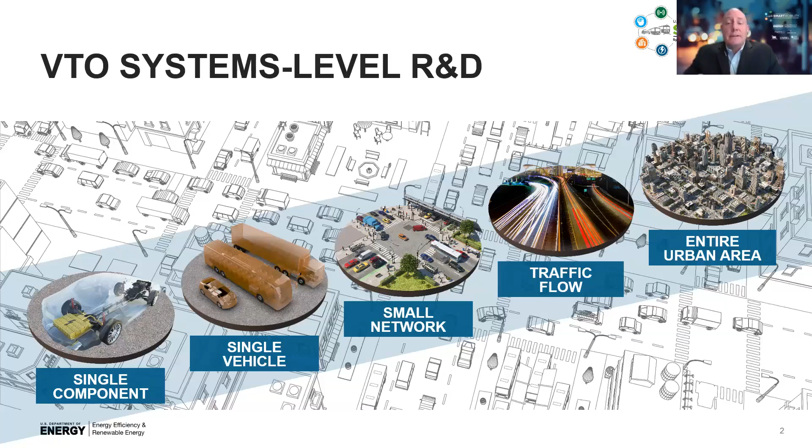So we look not only at technologies at the vehicle and powertrain and component level, but also at how vehicles interact with each other and with infrastructure at the small network or corridor scale, and then we can evaluate the system in terms of overall traffic flow and energy consumption, finally understanding mobility and developing solutions that improve mobility at the entire urban or metropolitan area.

To do this, to comprehensively research and model and develop solutions that reach across modes and domains, it takes a multidisciplinary approach. We have to consider transportation holistically as a highly interactive, very complex, highly dependent system of systems in which changes in one system can propagate to and affect others. And so while we must understand each of these systems individually, it's just as important, or maybe even more so, to understand how they fit together, how they interact, and how they affect one another.

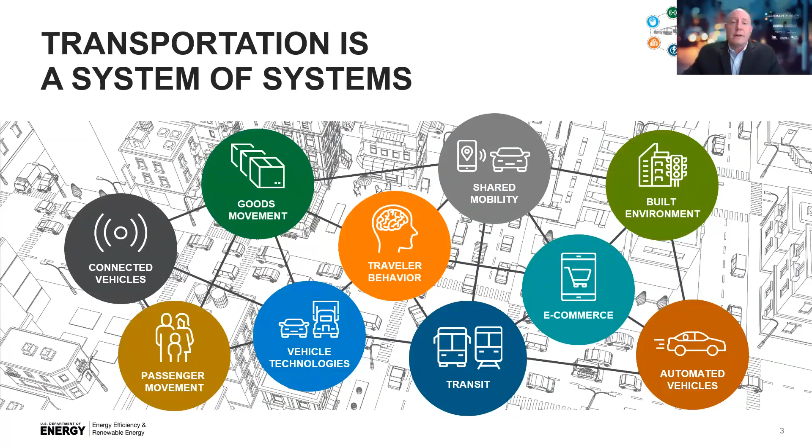The first phase of our consortium was divided among 5 pillars of research shown here, and they are connected and automated vehicles, mobility decision science, multimodal freight, urban science, and advanced fueling infrastructure. The research results that John and Eric will describe today largely come from the advanced fueling infrastructure focus area. But as I said before, the consortium is multidisciplinary and cross-cutting, and these focus areas were very much interrelated.

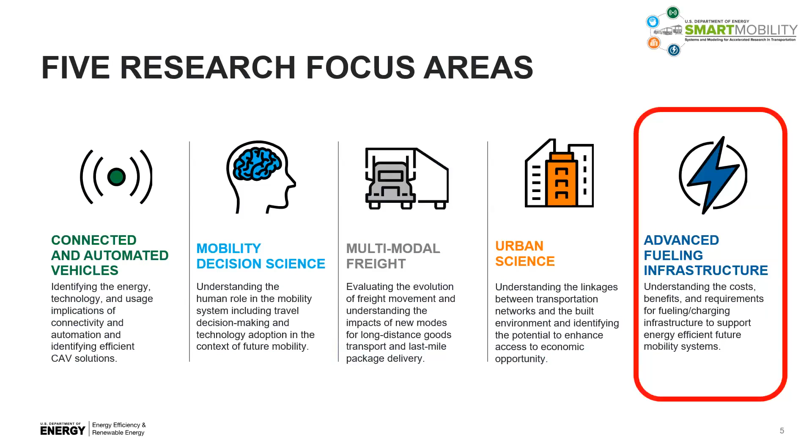Many of you are likely familiar with what has been called the charging pyramid. It applies to our current vehicle paradigm. The base of the pyramid says that most charging will be done at home, whether single family or multifamily dwellings. The middle of this pyramid says that the next highest need and use will be workplace charging and fleet charging, while public charging, typically at higher power, shown on the top of the pyramid, will fill in the gaps.

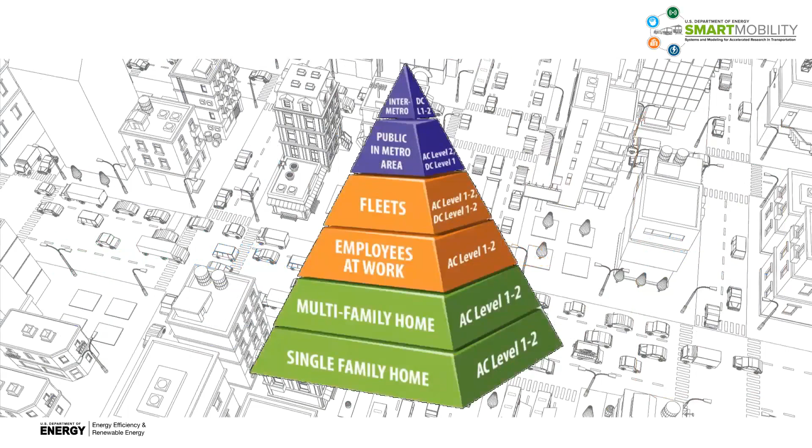But it may be that a future mobility scenario, which is automated and connected and largely shared or fleet operated, could turn this paradigm on its head. So our research set out to understand this, to understand what the need is for different types of infrastructure, whether it's centralized or distributed. What operating modes make the most sense? Is it more chargers? Is it faster charge rates? Is it longer range vehicles or more vehicles? And how do you manage the infrastructure to fit different scenarios?

We looked at charging infrastructure to serve both passenger movement and freight movement, and even evaluated the opportunities for wireless charging. After all, if we have automated vehicles, it may make sense to have automated charging. The research questions outlined in the Advanced Fueling Infrastructure Capstone Report, which is available to download on the VTO website, are summarized here. What are the charging needs of future vehicle and mobility service segments?

What are the costs and benefits of different approaches to charging infrastructure, specifically to serve light-duty ride-hailing vehicles and Class 7 and 8 freight vehicles? What are the opportunities for automated vehicle charging? And finally, if we plan and deploy the right set of charging infrastructure, what might the large-scale national benefits be?

Now, before I turn it over to John and Eric, I want to reiterate a point that I made at the beginning of this webinar series back in September. When we think about it, mobility is the foundation of how humanity interacts and connects, and we don't think that's an overstatement. It has driven the development of cities and of civilizations for centuries. Transportation gives us access to opportunity in the form of healthy food, good jobs, quality education, adequate health care, and plenty of leisure and recreational activities.

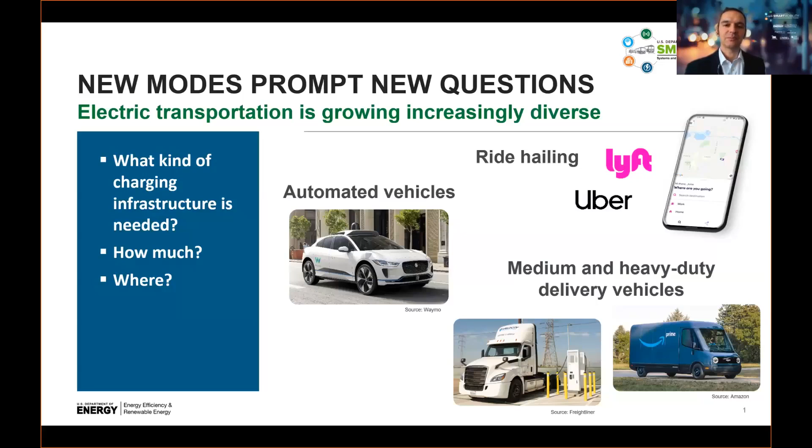Since we began our research, market developments have validated the importance of answering these questions. Waymo has launched the first public robotaxi fleet using plug-in electric vehicles. Lyft and Uber have made significant electrification commitments. Driverless electric shuttle demos are taking place in numerous cities across the country, and truck manufacturers are bringing electric trucks to market.

Our research found that there is no universally right amount of charging infrastructure. There is no golden ratio of charging stations to vehicles, because the charging needs of different modes and use cases vary. Additionally, even within individual use cases, trade-offs abound. Nevertheless, we found that it is possible to use modeling and simulation tools to manage cost-benefit trade-offs, provided that we understand the behaviors and interests of stakeholders in each use case. In this presentation, we'll share principles we have learned to guide charging infrastructure design for multiple use cases.

A similar distribution of driver activity patterns was found in a large GPS data set of ride-hailing activity in Austin, Texas, including 1.5 million ride-hailing trips. This data, made available by RideAustin, a local TNC, found that half of the drivers in the data set were operating less than 10 hours per week, and only 10% of drivers were operating more than 35 hours per week. While full-time drivers are often the focus of TNC electrification conversations, our work finds that they currently make up a minority of drivers and rides on TNC platforms.

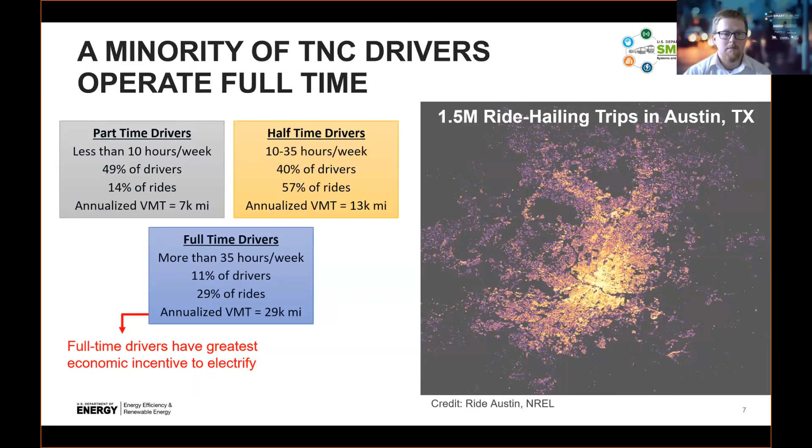For the minority of drivers working for TNCs full-time, we wanted to investigate the economic incentive for electrification. This prompted running a 5-year total cost of ownership analysis, considering present-day EV prices, the amount of time required for midday charging, and excluding federal or state financial incentives. Results of this analysis found that 250-mile EVs provide similar total cost of ownership to representative gasoline vehicles, and slightly higher cost than today's gasoline hybrids. These results were found to be sensitive to many variables, including vehicle purchase price and fuel costs.

Collectively, these first few slides suggest that there's a relatively weak financial incentive to electrify ride-hailing services under present-day economic conditions, especially considering that not all drivers have purely financial motivations, a minority of drivers operate full-time, and EVs currently come with an upfront premium. However, ride-hailing vehicles remain an attractive segment for electrification based on the potential energy and emission savings relative to vehicles operated only for personal use.

In order to realize these savings cost-effectively, progress must continue to be made on reducing vehicle purchase price through technological advances and economies of scale, potentially with purchase incentives used to bridge the gap. Importantly, these total cost of ownership results assume regular access to overnight charging. However, we know that is not always an option.

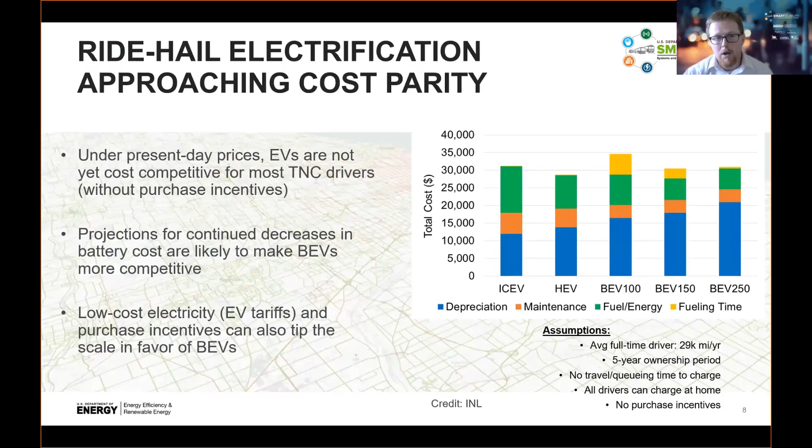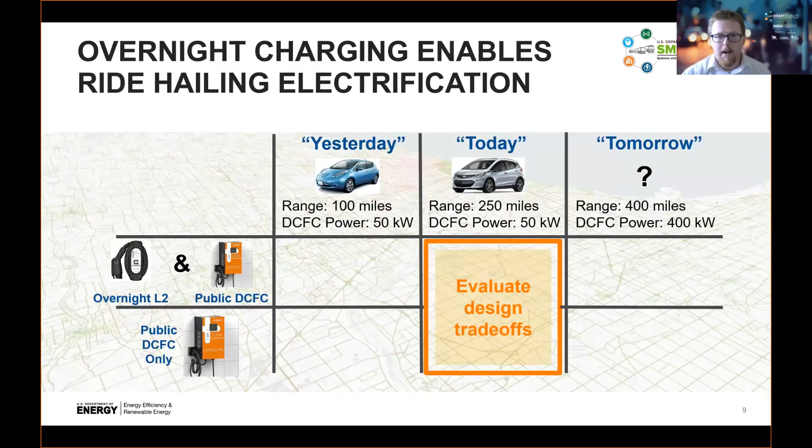To help illustrate the role of overnight charging in TNC electrification, a simulation experiment was designed using several combinations of vehicle and charging technology. While we don't have time to review all results today, I'd like to focus on a present-day vehicle technology scenario that highlights infrastructure design trade-offs between overnight level 2 charging as the primary charging location, with public fast charging used as necessary, versus a scenario where overnight charging is not available and public fast charging is the only option for ride-hailing drivers.

Simulations leveraged 5 million miles of real-world taxi operation data from the Columbus Yellow Cab fleet in central Ohio. Results showed that consistent access to overnight home or depot charging obviated much of the demand for public fast charging. In simulations where the fleet had access to overnight level 2 charging, only 9% of the fleet required midday public fast charging to maintain existing operations. However, in simulations where overnight charging access was restricted, we found 100% of the fleet relying on the public fast charging network 1 to 2 times per day.

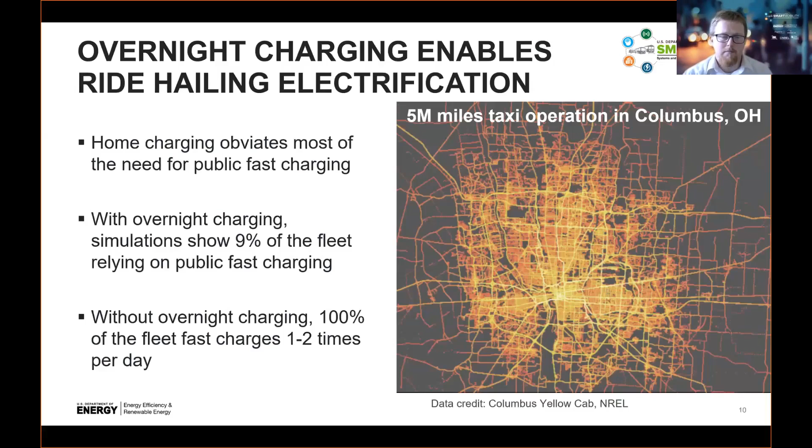This dramatic increase in demand highlights the need to understand the socio-demographic characteristics of ride-hailing drivers. Revisiting results from the Populus National Survey of over 1,000 TNC drivers, we find that 40% of drivers live in multi-unit dwellings, with lower income households being more likely to rent and/or live in an apartment. For example, over 80% of TNC drivers from households with an annual income below $35,000 either rent their home, live in a multi-unit dwelling, or both.

This result emphasizes that efforts to electrify ride-hailing fleets must not only be accompanied by investment in public fast charging to support high-mileage drivers, but also by investment in public and private level 2 infrastructure at or near where TNC drivers live in order to enable regular overnight charging.

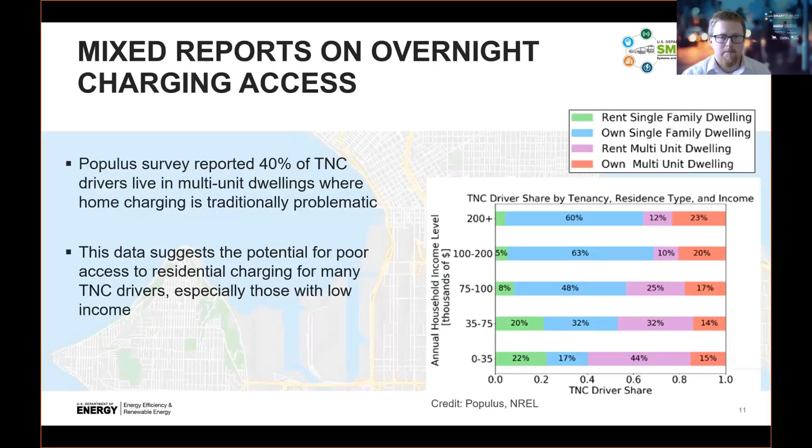Thinking further about investment in public infrastructure, it's no secret that the capital costs of fast charging infrastructure are significant. Does the site have sufficient hosting capacity? Are electrical upgrades required? How much trenching is necessary? The answers to these questions can result in a capital cost varying significantly from site to site. This realization may prompt charging networks to search the region in hopes of finding the least costly site for development of new fast charging stations.

While tempting, our work suggests that failure to design networks around anticipated demand can make low capital cost locations financially problematic in the long term. A simulation study conducted in Columbus, Ohio, in partnership with the local electric utility, American Electric Power (AEP), evaluated a dozen potential fast charging sites. Based on the simulated charging demand and existing tariffs, we found that the effective cost of electricity at sites with low demand was financially unsustainable in the long term.

Sites with less than 250 sessions per month were forecasted to experience effective electricity costs up to 75 cents per kilowatt hour. These estimates exclude capital costs and are largely a result of inability to distribute demand charges in a sustainable manner. However, well-utilized sites were able to bring down the effective cost of electricity to below 20 cents per kilowatt hour, a much more reasonable expense.

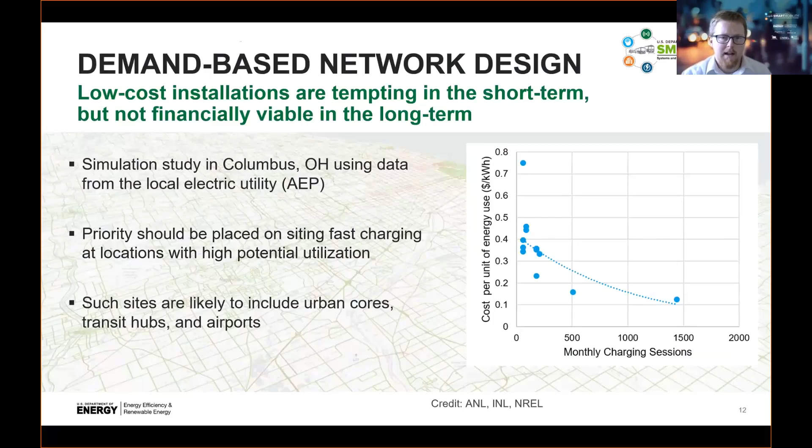While we've been focusing on charging infrastructure as it relates to ride-hailing electrification, investments in public charging do not necessarily happen in a vacuum. As part of our research, we wanted to explore what secondary benefits may be associated with investment in public fast charging infrastructure supporting TNC electrification. To do this, we coupled a national model of consumer choice for forecasting personal vehicle sales with a charging infrastructure demand model in order to evaluate scenarios with increased demand for ride-hailing at various levels of electrification.

Results suggest that investment in public charging infrastructure not only can benefit ride-hailing drivers, but also induce demand for sale of personal EVs by up to 10% in 2030. These benefits stem from increased public exposure to EVs as a TNC passenger, increased visibility of infrastructure alleviating range anxiety, and providing more away-from-home options to households without consistent residential access.

Additional benefits are garnered by charging network companies who have the potential to experience increased utilization of charging infrastructure driven by demand from personal EVs and TNC EVs without residential access. With that, I'll turn it back over to John to present results from additional use cases.

Thanks, Eric. Now I'll summarize findings from our study of human-driven electric car sharing.

Next, we looked at electrification of trucking for regional goods delivery. In a case study of a private regional haul hub and spoke motor carrier based in Dallas, Texas, we modeled Class 8 truck operation where the trucks have access to high power charging at loading docks. We varied EV range from 300 to 500 miles and charging power between 150 and 350 kilowatts. And we determined what it would take for electric trucks to perform the same daily driving as the current conventional truck fleet.

Real-world data describing the operation of this fleet indicated that drivers often chain several trips together into routes or circuits. Often, trucks drive circuits of over 300 miles before returning to the originating regional distribution center.

In our modeling, we made generous assumptions that trucks would plug in without queuing and charge continuously without any power curtailment at regional distribution centers and at every destination along the circuit where loading and unloading occurs.

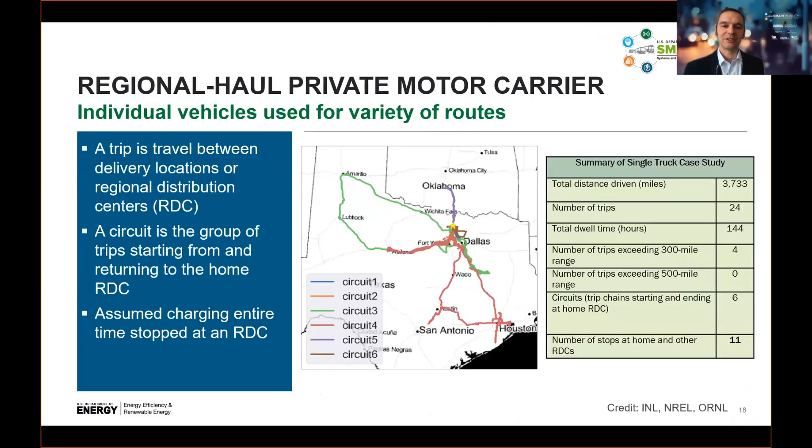This suggests that fleets of this type will need to either use trucks and charging equipment capable of very high power, or adjust their operations to accommodate electrification. Fleets may need to lengthen dwell times to allow for sufficient charging, take time to charge at public charging stations, or limit electric trucks to specific routes.

These complexities add real costs to fleet operations. To realize the potential benefits of electrification, fleets need new tools to help them not only define vehicle and charging infrastructure requirements, but also understand and manage required operational changes.

Now I'll describe our work with automated electric ride-hailing. Using sophisticated modeling tools in the smart mobility modeling workflow, we simulated the operation of automated electric ride-hailing vehicle fleets in San Francisco to understand how charging infrastructure impacts the fleet's ability to serve passengers.

We included human-driven electric and human-driven conventional ride-hailing vehicles in the simulation to represent a competitive market. We examined trade-offs between fleet and charging infrastructure design, mobility, energy consumption, and cost by simulating fleet operation with either sparse or rich charging infrastructure networks.

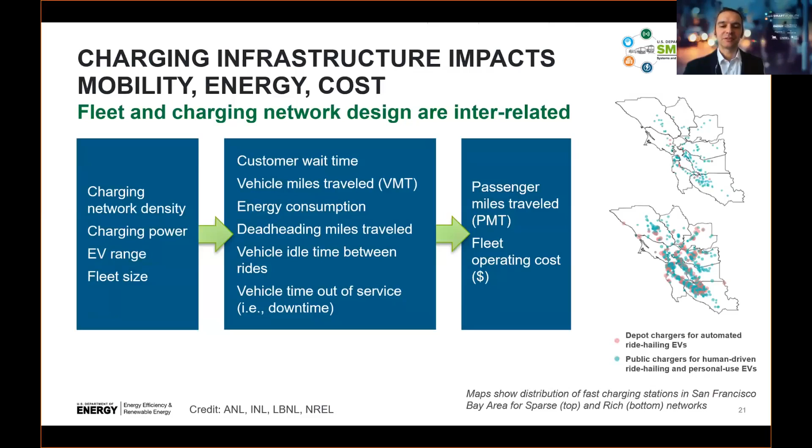The primary output metric from our simulation was passenger miles traveled, or PMT, which is a measure of the fleet's ability to provide mobility to passengers. We found that PMT is directly proportional to fleet operating costs.

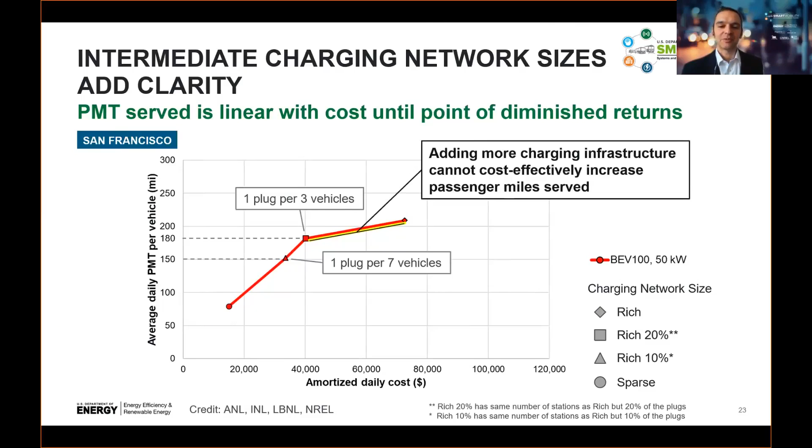In summary, the cost to the fleet per passenger mile served is about the same for many of these cases. To expand the capacity for human-driven and automated electric ride-hailing fleets to serve more passengers, increasing the size of the DC fast charger network, increasing charging power, or increasing vehicle EV range, each are similarly cost-effective to a point.

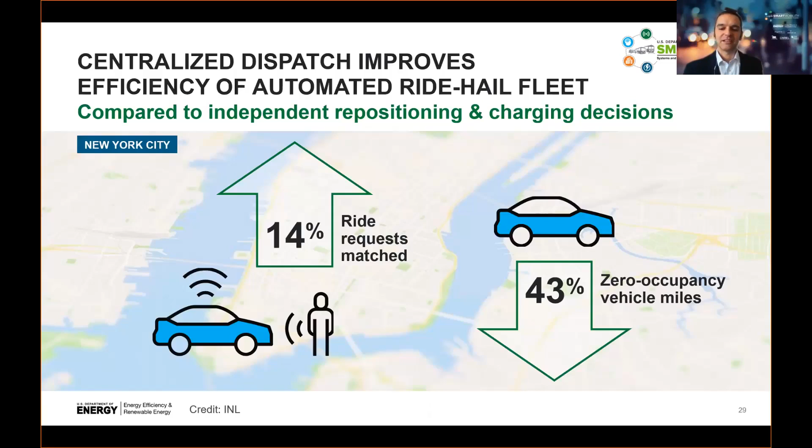We found that for a fleet with about 2,000 ride-hailing AEVs, centralized fleet management would allow the fleet to satisfy 14% more ride requests and drive 43% fewer deadhead miles, compared to the case where individual AEVs make independent dispatching decisions.

Our final use case was automated transit. We examined the potential for dynamic or in-road wireless power transfer to charge automated shuttles while they're operating on fixed routes.

A simulation of an automated electric shuttle bus network showed that 5-meter-long, 100-kilowatt wireless charging systems located at bus stops spaced about a mile apart along a fixed route could allow electric shuttle buses to operate continuously at low speeds of up to 15 miles an hour. That speed range is indicative of today's technology.

Increasing the wireless charging system length to 175 meters could allow automated electric shuttles to continuously operate at speeds of up to 50 miles per hour, which is more representative of typical transit operation. This would allow driverless shuttle buses to operate with near zero downtime, which would enable fewer buses to provide increased quality of service, potentially at lower cost, compared to equivalent human-driven shuttle buses without dynamic wireless charging.

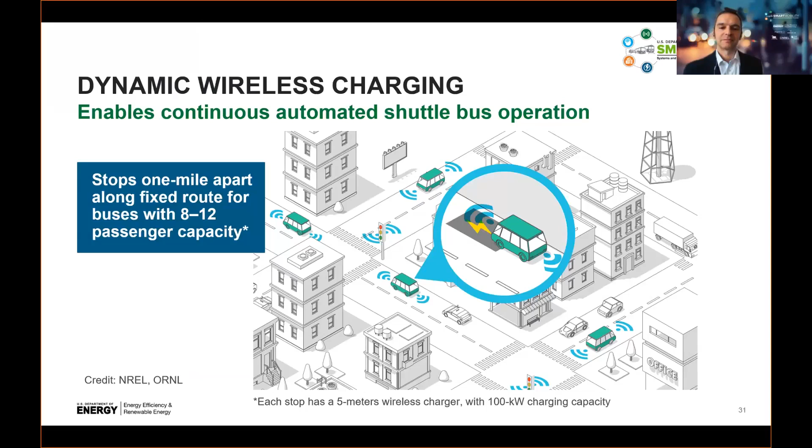Thanks, John. For those of you that have tuned in to any of the other Smart Mobility webinars, you'll notice that a common theme of the consortium is the ability to integrate data and modeling capabilities into a shared workflow.

Centered around metropolitan scale, agent-based transportation demand models, this workflow incorporates traffic simulation and vehicle connectivity at multiple levels in the simulation of passenger and goods movement, considering an array of travel modes and vehicle technologies.

Results can be analyzed with varying degrees of resolution and include key performance indicators such as vehicle and passenger miles traveled, energy consumption, and mode choice, all of which can be rolled into an aggregate mobility energy productivity metric, or MEP for short. As part of the consortium, this workflow has been applied to a variety of future scenarios with an emphasis on exploring impacts of various vehicle automation and mobility sharing pathways.

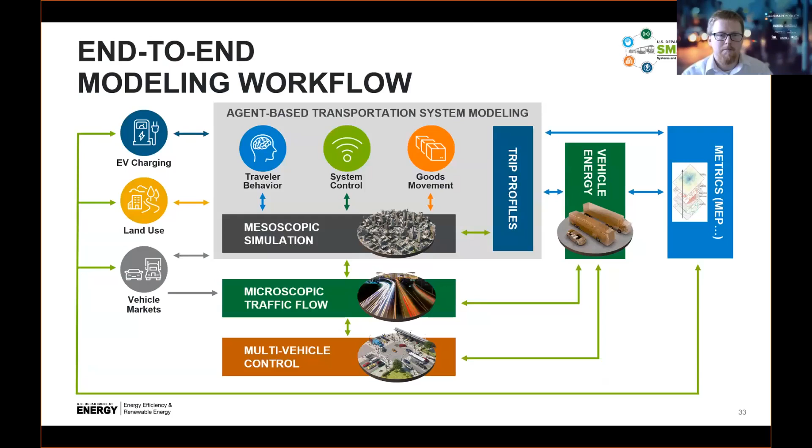These models consider multiple EV technologies, including plug-in hybrids, and capture demand from personal vehicles, human-driven ride-hailing, and fleets of shared autonomous EVs. These models have been integrated with NREL's Electric Vehicle Infrastructure Projection, or EVI Pro model, to design hypothetical charging networks capable of meeting the simulated demand in each future scenario. Results provide an unprecedented glimpse into potential charging network designs and are one of the only tools for forecasting the spatial distribution of charging demand in deep electrification scenarios.

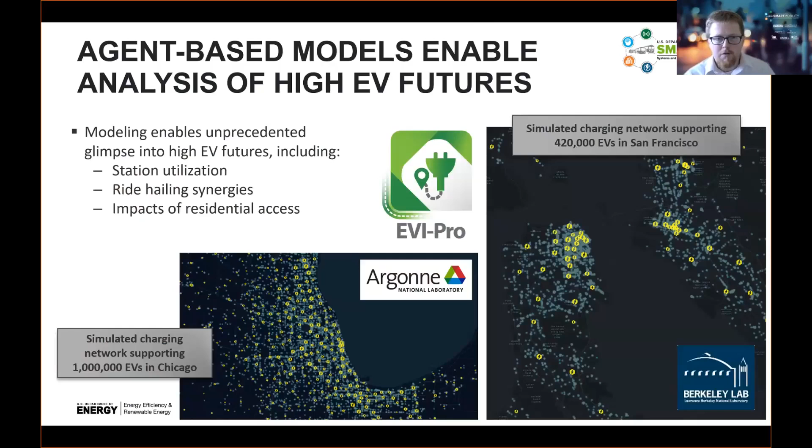An ongoing study being conducted in partnership with the New York State Energy Research and Development Authority, or NYSERDA, is focused on estimating charging infrastructure investment needs for meeting the state's goals for zero-emission vehicles. This work includes detailed agent-based modeling of electric ride-hailing in New York City, with consideration for supply-side constraints, including limited access to parking and electrical infrastructure in New York City and Manhattan in particular.

In a recently completed effort with the Ford Smart Mobility team, agent-based models of electric ride-hailing were developed in 4 U.S. cities. In each city, 5 potential mixes of future grid generation were considered, with the desire to quantify the charging load flexibility of a fleet of shared autonomous electric vehicles. Results suggest significant load flexibility from such a fleet, with annual electricity cost savings up to 46% relative to an unconstrained baseline. With that, I'll turn it back over to John to bring us home.

Based on our findings, we make the following recommendations. First, design around demand. Site public charging stations in locations where ride-hailing drivers need to use them, even if those locations require expensive installations. Second, look beyond simply adding more charging stations. In many cases, it may be prudent, if not necessary, to increase charging power and/or EV range. And in some cases, adding more charging stations may not have much benefit at all.